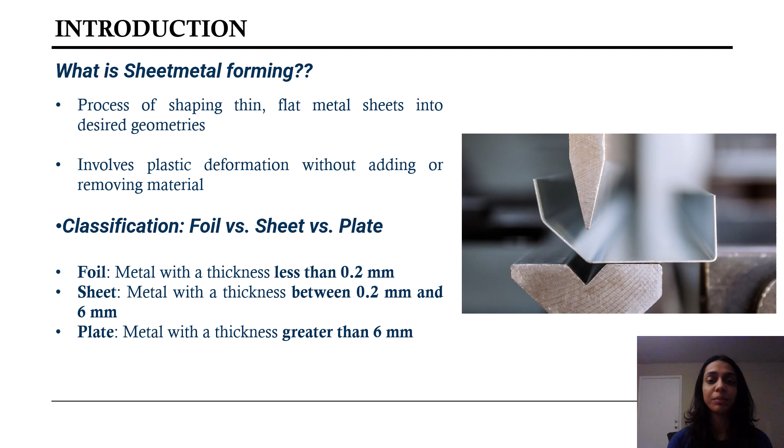Sheet metal forming is especially valuable for producing lightweight, strong components quickly and efficiently. It's essential for industries that rely on scalable, repeatable manufacturing. Sheet metal is just all around us. You name the industry and you have sheet metal there.

The automobile industry uses it in car doors, hoods, trunk lids, chassis, reinforcements, and underbody panels. In the beverage and packaging industry, sheet metal is deep drawn into aluminum cans for drinks and food storage. In aerospace, it forms the skin panels of the fuselage, turbine engine shells, and interior panels. In construction, sheet metal is used for building panels, roofing, cladding, and ductwork.

For aesthetic applications, it provides seamless and polished surfaces on consumer electronics. In the electronic industry, it's widely used for making enclosures, heat shields, and mounting brackets for devices like laptops, routers, and control panels. You'll ask why sheet metal forming is so popular.

First, it's material efficient. Since we are reshaping the material instead of cutting it away, there's very little scrap. Second, it supports extremely high production speeds, which is perfect for mass production. It also produces parts that are both lightweight and strong. Surface finish is often excellent, meaning parts can go straight to assembly without secondary operations.

The tooling, once built, allows for cost-effective production at scale, and because the process supports complex shapes, design flexibility is quite high. All these reasons combined make sheet metal forming one of the most economical and versatile processes in manufacturing.

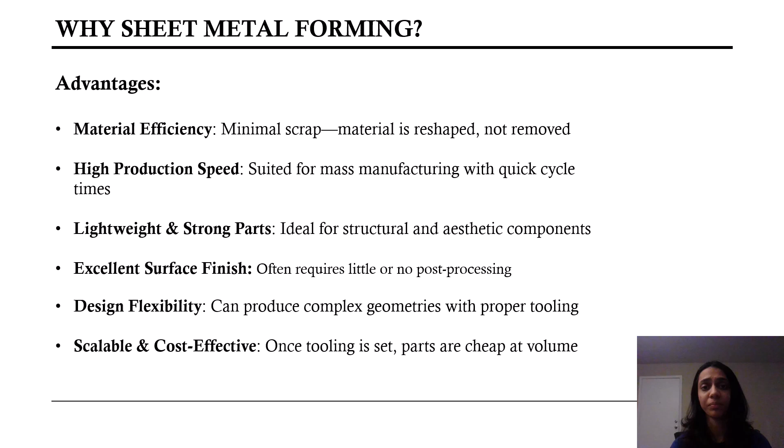So to understand how sheet metals behave, we need to first take a look at how it's made. Sheets are produced by rolling, hot or cold, through a series of rollers that compress and elongate the metal. This aligns the grains in one direction and makes the metal stronger in that direction. This introduces a phenomenon called anisotropy, which means the material's mechanical properties vary based on direction.

If we form or bend the sheets along the same direction as the rolling, the part is more likely to crack or wrinkle. But when we bend the material perpendicular to the grain direction, it helps achieve a cleaner result. Now let's take a look at the 5 material properties that really influence how sheet behaves during forming.

Ductility, as we know, is the ability of the material to undergo plastic deformation before failure. In terms of sheet metal, higher ductility allows it to be drawn or stretched into more complex parts without cracking, especially relevant in processes like drawing or stretch forming.

Malleability is the sheet's ability to be compressed without cracking. It's critical in bending and deep drawing. Yield strength is the stress at which the material starts to deform permanently. Lower yield strength generally means that the material is easy to form.

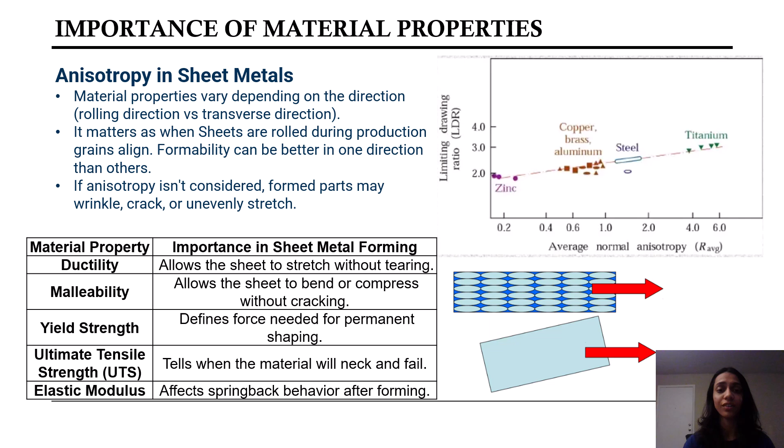So let's go over the most popular forming processes. First, we have bending. This is where we deform the sheet along a straight line to create an angle. V bending usually uses a V-shaped punch and die, while U bending creates a U profile. You'll see this in brackets and chassis parts usually.

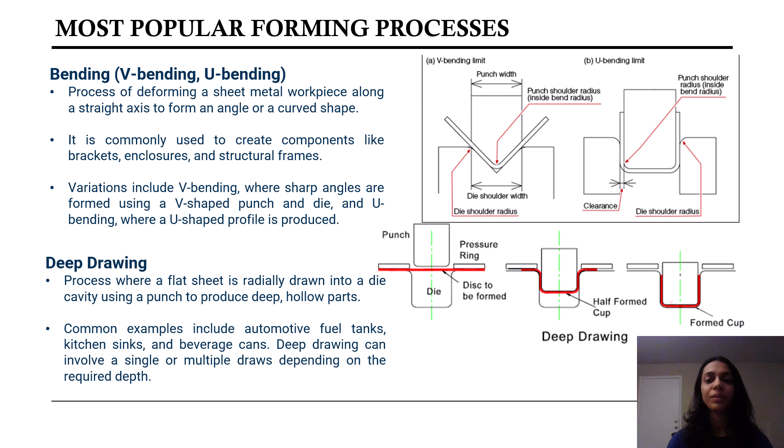The next is deep drawing. We pull a sheet into a die cavity using a punch to make a deep hollow shape. This is how we make sinks, beverage cans, and automobile fuel tanks.

Stamping is a fast, precise process where sheet is pressed or sheared between a punch and a die. This is a normal cutting operation, ideal for high-speed production. Common stamping operations include punching or piercing to create holes, blanking to cut out a part, notching, which is used to remove material from the edges, and lancing, which is used to partially cut and bend the material in one stroke.

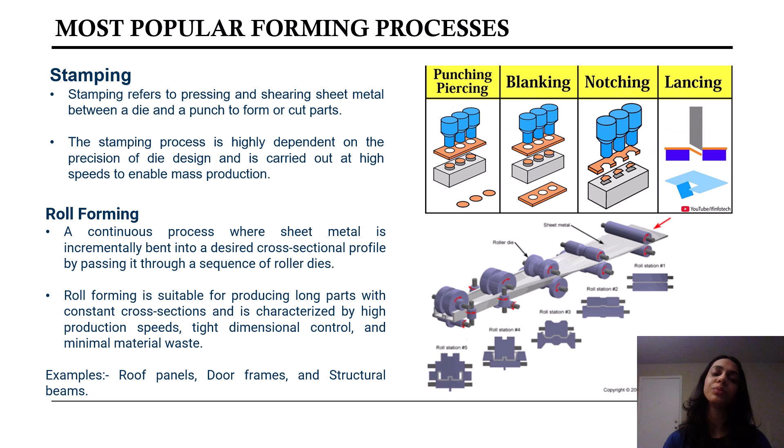Then we have roll forming, which is a continuous process where the sheet passes through a series of rollers, where each one incrementally shapes the material until the final cross section is formed. This step-by-step shaping allows complex constant profile parts to be produced efficiently, like door frames, beams, and structural rails.

Next, we have embossing and coining. Embossing creates raised or recessed designs on sheet surfaces, often for textures, logos, or grip enhancement. Coining is a high pressure forming technique that produces sharp, detailed surface features like patterns or edges.

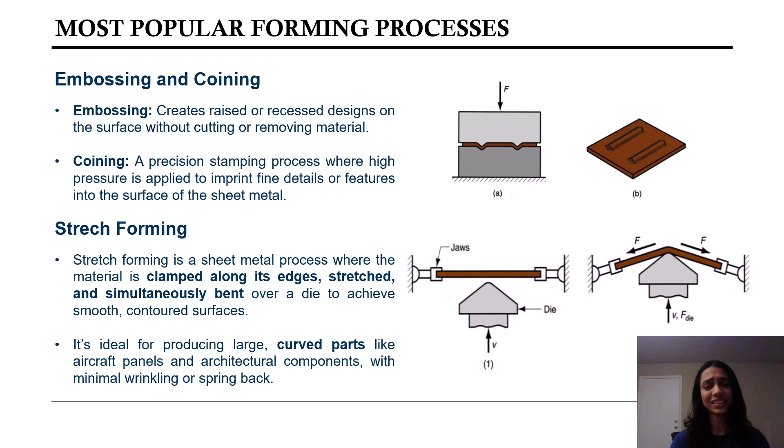Then we have stretch forming, which pulls the sheet in tension while it's wrapped over a die, allowing large, smooth contoured shapes like wing panels or architectural elements to be formed with excellent surface finish.

Now that we went through sheet metal forming processes, let's get into the guidelines. Designing for bending begins with bend radius.

It is a critical rule that the inside bend radius should be at least equal to the material thickness. If you use a smaller radius, it risks surface cracking on the outer side and compression buckling on the inner side. There's also a direct relationship between the material's hardness and the minimum bend radius required.

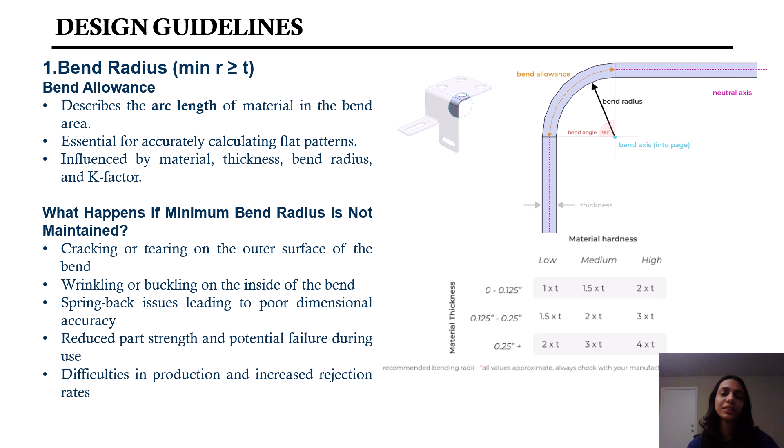We also calculate bend allowance, which tells us how much material is needed in the bend to create accurate flat patterns. This is influenced by radius, thickness, and a property known as K factor, which represents the location of the neutral axis during bending.

Finally, we must consider material orientation. As we discussed in anisotropy, rolling aligns grain in one direction, which affects how the sheet behaves when bent. Bending along the grain can cause cracking, while bending perpendicular improves formability. This is especially critical for high strength alloys. So we can see that orientation affects bend quality, reminding us to plan the layout carefully.

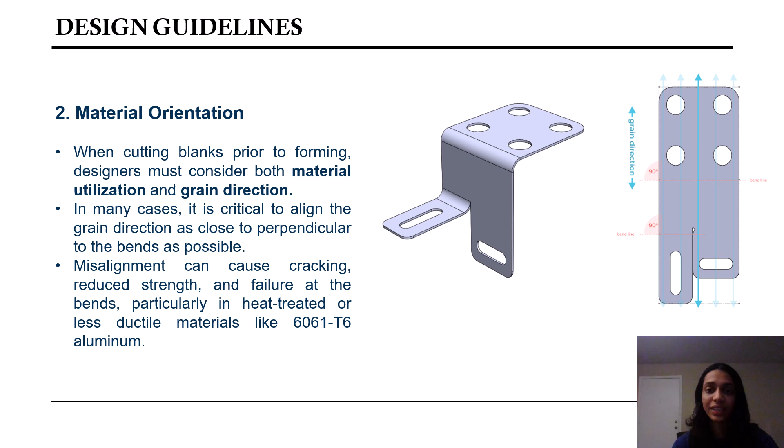So designing for holes, the diameter should be at least equal to the sheet thickness. From the edge of the sheet, the distance should be 1.5 times the thickness. And between holes, we have to leave 2 times the thickness.

We also have to consider that placing two holes too close together can cause material tearing or distortion during forming. And if the holes involve fasteners, we have to take into account the tool clearance needed around the hole so that the fastener tool can properly do its job.

From a bend, the distance should be at least 2.5 times the thickness plus the bend radius to avoid warping during bending.

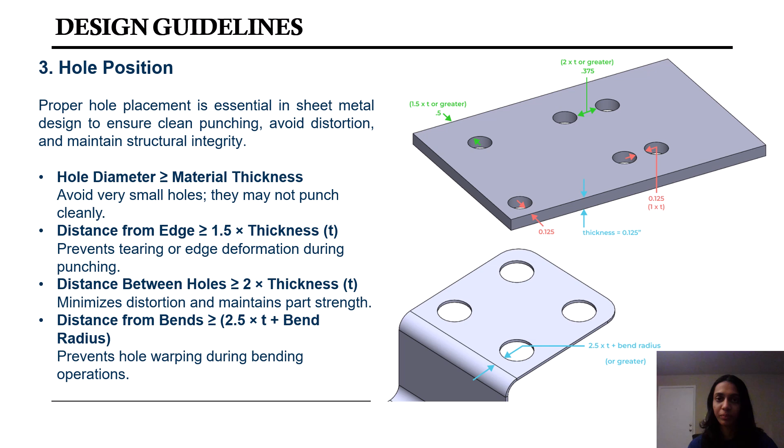Bend reliefs are important when bends end near the edges or cutouts. Without reliefs, the material can tear or stretch unpredictably. As a design guideline, the relief length should be at least equal to the bend radius plus the material thickness, and the relief width should be no less than the sheet thickness. The rounded ends further reduce the stress concentration and tearing during bending.

So you can see here how there are two different parts, one which has bend relief and one without. It's actually not feasible to even manufacture parts which don't have bend relief.

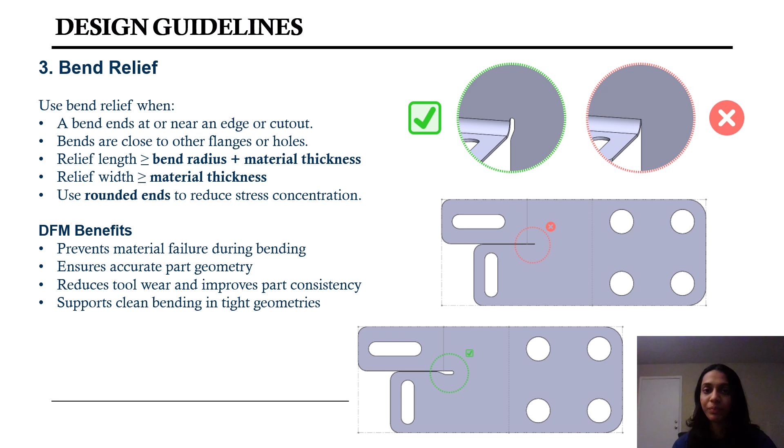For slots and notches, the width should be at least the material thickness. Keep them two thicknesses from edges and four from bends. Notches should have a corner radius of 0.5 times the thickness and should not be too deep. If they are placed too close together or too near edges, they can act as stress risers and initiate tearing during forming or under load.

Also, if fasteners or hardware are planned near these features, additional spacing must be required in order to accommodate the installation tools and maintain structural integrity.

Tabs should be at least two times the thickness wide and placed far enough to prevent buckling. So from a DFA perspective, tabs allow for simplified part alignment and reduce the necessity for secondary fixtures during assembly. They are typically created as small extensions during blanking and later bent to help with tasks like fastening, slotting, or securing parts in temporary position.

Tabs are commonly used in enclosures, brackets, and chassis structures. However, if tabs are too narrow or closely spaced, they may fail during forming or assembly. Poor design tabs can complicate automation or lead to part deformation, making them a critical feature in DFM and DFA integration.

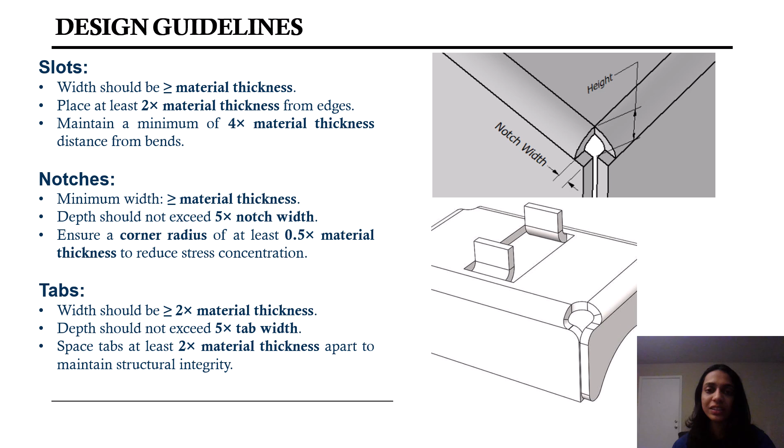So we discussed general design guidelines, and now we can move on to stiffening techniques. Gussets are triangular reinforcements added at junctions or corners to strengthen a part without adding much weight. From a DFM perspective, they increase rigidity without adding an extra component.

So if we are not including a gusset and you want to make the L shape rigid, you might have to add another material and weld it together or fasten it. However, from a DFA standpoint, they might complicate the assembly if not aligned with joining features or tool axis.

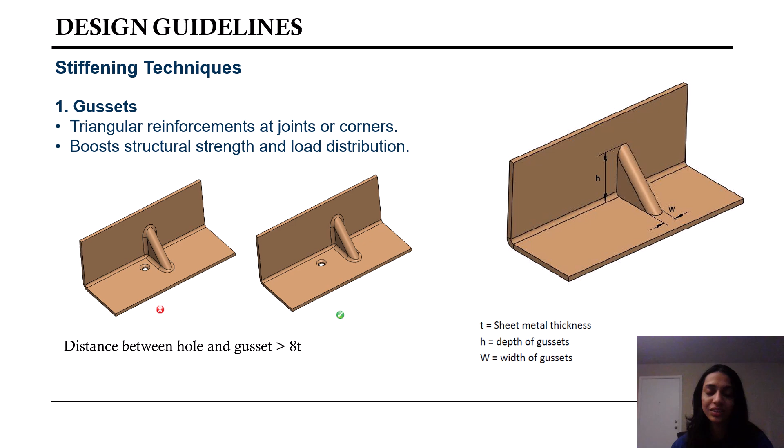Flanges and lips are bent edges that add stiffness and provide clean surfaces for fasteners, rivets, or welds. From a DFM perspective, they increase the structural integrity without extra parts. In DFA, flanges help align parts during assembly.

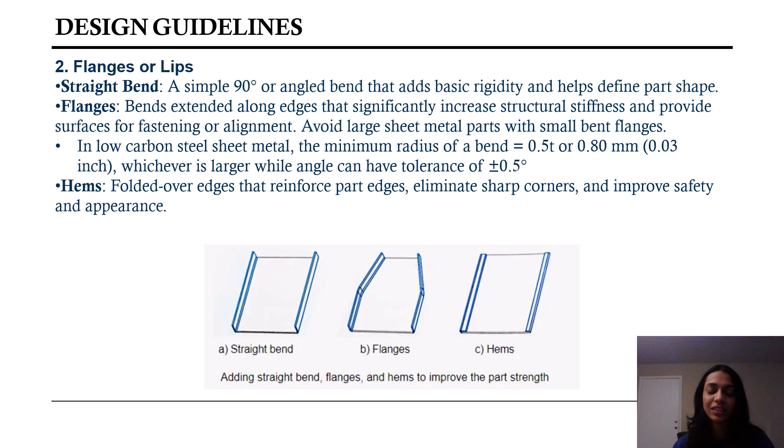Hems, which fold the edge back onto itself, are mainly used for safety and aesthetic purposes, which eliminate sharp edges. So I have seen them in scooter body panels where hems are used so that sharp edges are eliminated basically.

So curling forms a smooth looped edge which removes sharpness and improves appearance. It's commonly used on the edges of panels, doors, or consumer-facing products. Curling is typically done using a curl die that bends the edge into a near complete circle.

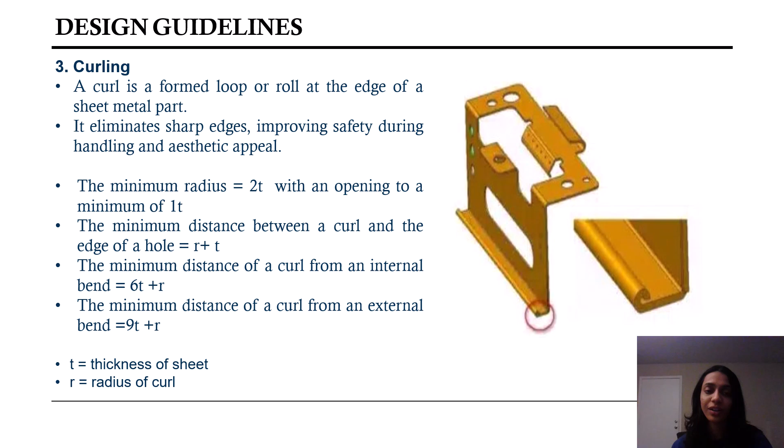Design guidelines suggest maintaining a minimum curl radius and ensuring sufficient spacing from nearby bends or holes to prevent distortion or thinning. Proper curling enhances safety, reduces handling injuries, and improves the product aesthetic. You can go through the design guidelines that are listed here.

Ribs are basically raised lines on flat panels that increase the moment of inertia by improving the resistance to bending and buckling. They are typically formed using matched male-female die sets. From a DFM perspective, ribs add stiffness without increasing the material thickness.

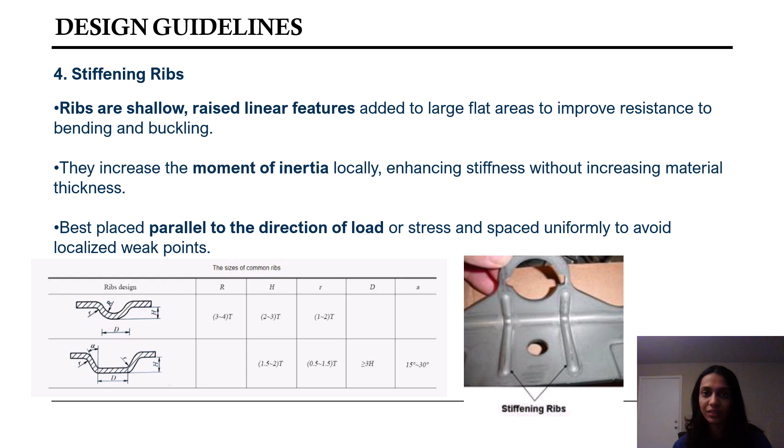In DFA, properly positioned ribs can help guide mating parts or resist deformation under assembly forces. However, poor rib placement can interfere with parts nesting or complicate tooling access during assembly.

So now you have taken all the design guidelines into consideration. You got your perfect part. Now nesting is the last piece of the puzzle. Nesting is how we lay out our parts on metal sheets before cutting or forming. Good nesting improves material efficiency, reduces scrap, and shortens the cutting path. This not only lowers cost but also supports faster production and more sustainable manufacturing.

One final detail is that when we are designing shear features like interlocks or breakaway tabs, we have to ensure that the width is at least 2 times the sheet thickness to develop enough shear strength during separation.

It is important to nest parts while considering grain direction, bending locations, and spacing. Proper nesting helps us make the most of each sheet, especially in high volume production.

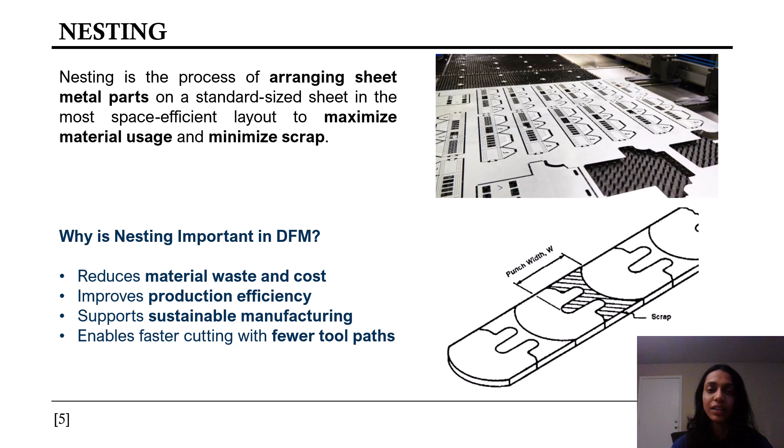Now let's look at how we estimate the cost of a die set in sheet metal format. Die cost is primarily influenced by two things: the usable area between the guide pillars and the manufacturing complexity of the part. In general, the cost of die set CDS, is where CDS is the die set purchase cost in dollars and AU is the usable area in centimeter square. We start with a fixed base cost of 120 and add a variable cost that scales with the area. The first plot here virtually confirms this linear relationship between area and cost. As the usable plate area increases, the die cost rises steadily, but area alone does not tell the full story.

Also considering complexity of the part, we use the formula of XP, where XP is a non-dimensional complexity factor, and P is the perimeter which will be sheared, while L and W are the length and width of the smallest enclosing rectangle. The complexity factor increases with irregular part shapes or higher perimeter to area ratios. The second graph here shows how basic manufacturing effort, measured in points, increases with complexity XP. So more complex shapes, even with similar areas, will be costlier and harder to tool.

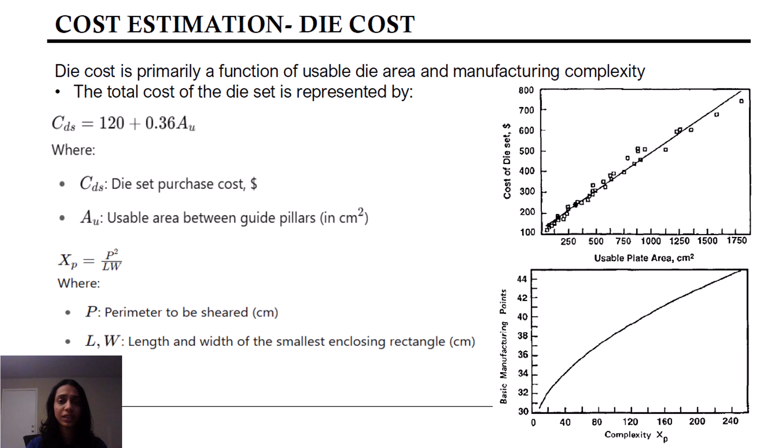The key assumptions here are that the material of the die is standard tool steel, the process uses conventional guide pillars and press setup, and the cost model assumes mild volume production, not amortized over high volume runs.

The die plate thickness correction factor is calculated with the formula FD, where there's a minimum value of 0.75 taken, whichever is larger. So we now need to compute HD, the required die plate thickness based on wear and stiffness requirements, which is given by the formula you can see below.

U is the ultimate tensile strength of the material. UMS is the strength of annealed mild steel, used as a baseline. V is the production volume, in thousands. H is the sheet thickness in mm. As the production volume or material strength increases, or when the sheet is thicker, the die needs to be stiffer and more wear resistant. Hence HD increases and so does the cost.

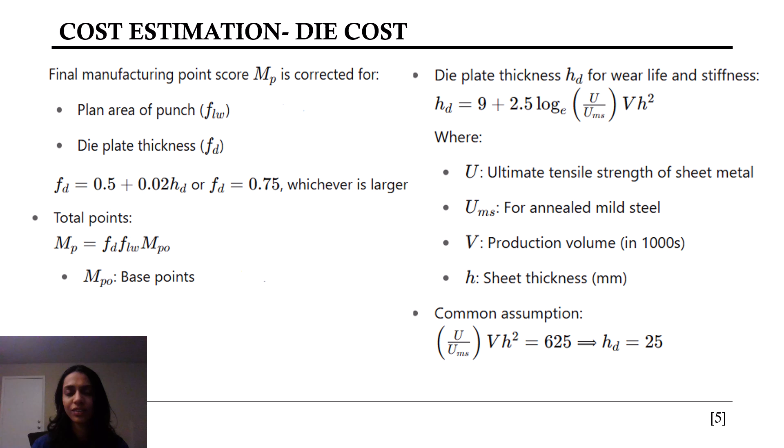So the base manufacturing score is noted by MPO, given by the equation below, where L and W are the enclosing rectangle's length and width in centimeter, capturing the footprint of the flat pattern, and D is the depth of the formed part. If the depth is less than 5 centimeters, we still use 5 as the minimum, which ensures that shallow parts don't get underestimated in effort. The formula basically scales the base points with part size and depth. Larger, deeper parts need more material flow, tooling control and press tonnage, hence the score increases.

Next, we add the effort due to bending operations, since each bend adds tool complexity and setup time. That is given by the equation of MP, which you can see. LB is the total length of bend lines across the part in centimeter, while NB is the number of unique bends or stations. This equation gives us a clear way to quantify how much extra effort each fold or bend adds. Longer bends take more press energy, while a greater number of bends means more tool changes or stages in the operation.

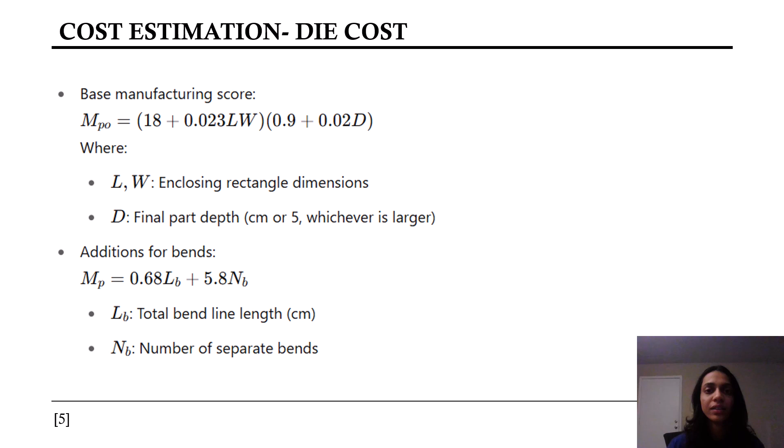So let's say we are given the base manufacturing point score MP0, which is 30.5, calculated using the part's envelope dimensions and depth. The plan area is length into width, which we'll consider 300 centimeters square. This gives us an area correction factor FLW of 2.5, which comes from the graph shown on the right and varies based on complexity and punch area.

Next, we calculate the die thickness, where HD is 26.6 mm, based on production volume, material strength, and sheet thickness. Plugging that into the correction formula, we get FD equal to 1.03. Now we calculate the adjusted manufacturing effort, where MP is 78.5.

The die set cost is calculated using the CDS formula, which comes out to 390, where 750 centimeters square is the usable guide pillar area. Now we calculate the total die cost by multiplying manufacturing effort with the cost per point, where here we have $40 per point. So the total die cost comes out to $3,530.

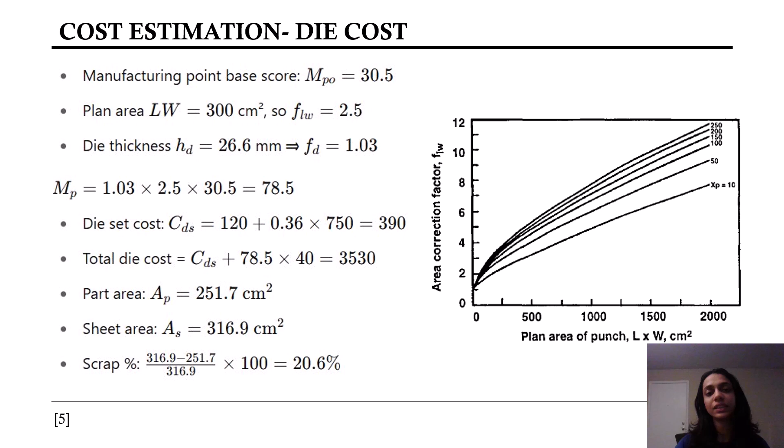We also analyze the material efficiency, where the part area is 251.7 centimeters square and sheet area required is 316.9 centimeters square, which gives us a scrap rate of 20.6%. This example shows how each factor - geometry, material strength, production volume, and part complexity - feeds into the comprehensive and scalable cost estimation framework for tooling. This kind of insight is invaluable in design for manufacturing decisions.

Let's consider the time estimation which adds up to the die cost. The force required for shearing is given by the equation F equals 0.5 into U into H into LS, where U is the ultimate tensile strength of the material, H is the gauge or thickness of sheets in mm, and LS is the total shear length, also in mm. This gives us a shear force in Newtons, which helps us determine the press force required.

With this, we can estimate both production time and press operating cost, which helps us decide whether a larger speed or a larger press force is economically justified based on our desired volume or complexity of the part. These values feed into both direct labor cost and capital equipment planning, ensuring our forming line is optimized for speed, force, and cost efficiency.

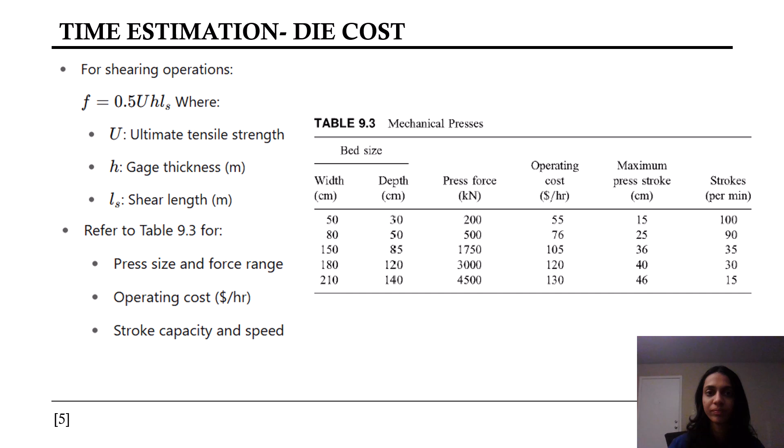So we have looked at shearing. Now let's explore bending, shallow forming, and embossing processes, which are also crucial in determining die size, press force, and time. For wiper die bending, an approximate bending force is given by the two formulas shown below, where U is the ultimate strength of the material, H is the thickness, LB is the total length of the bend, and R1, R2 are the radii of punch and die profiles.

For shallow forming, like drawing a shallow dome or dish, the required force is given by the formula shown below. Theta is the wall angle of the form feature. Force increases as the wall angle gets steeper or material gets thicker.

So finally for embossing, which involves pressing fine features or logos into the surface, the force is determined by F equals phi U into A, where A is the area to be embossed, phi is the constraint factor which is greater than 1, accounting for extra resistance due to confined flow. These formulas help us determine the press capacity needed and time per operation.

More force generally means slower cycles or more robust tooling, which in turn feeds directly into both cycle time and die cost. By calculating accurate force for each operation, we make informed decisions about machine size, tool material, and throughput, ultimately optimizing both performance and cost.

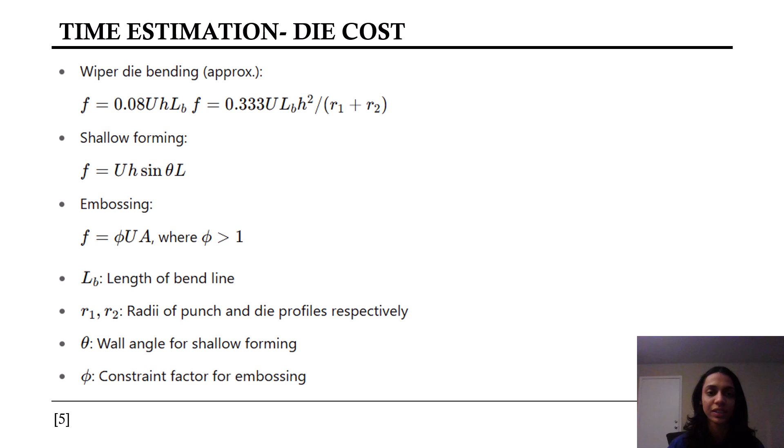To complete the time and cost estimation, we also need to factor in loading and unloading time, and ultimately calculate the cost per part. The time estimated to load and unload the part is given by the first formula, in seconds, where L and W are again the overall length and width in centimeters. This equation accounts for handling time and scales with part size.

For blanking and piercing operations where auto ejection is used, only 2/3 of this time is applied since parts are ejected automatically. For bending, however, the full cycle time applies because parts are often removed manually to prevent damage or warping. Once we know the time spent per press station or operation, we can compute the cost per part, which is CP, using the formula given below.

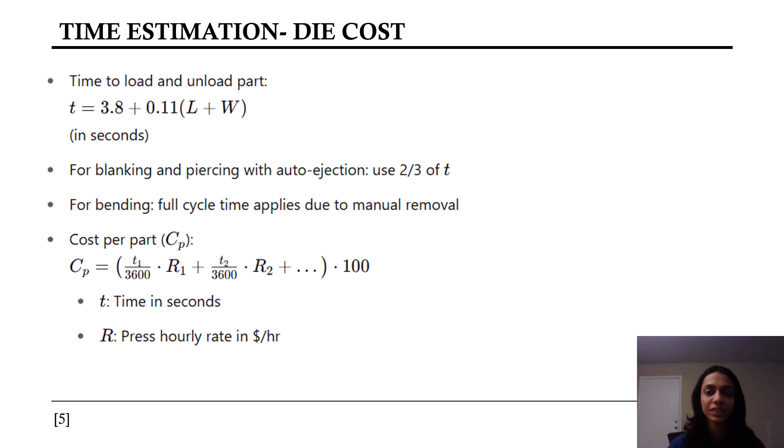T is the time of operation in seconds, and R is the press hourly rate in dollars. This gives us a very detailed and operation-specific way to estimate forming cost per unit, letting us directly compare process routes or tooling choices and justify automation investments or press selection decisions.

Let's wrap up the time estimation by discussing progressive dies, which combine multiple operations like shearing, piercing, and bending into a single automated process. The total force required here is the sum of the forces of all the operations in the die.

If we are designing a progressive die, say for 4 stations, we also need to allocate the physical space. That is calculated by 4 into 100mm plus 3 into 2 times the thickness, where 3 is the gap between the stations. The formula gives us a total strip length of about 418.5 in this case. This is critical when designing strip layout and estimating blank feed per stroke.

For cycle time, progressive dies operate at a high speed, given by 60 upon strokes per minute. We also have the cost per part, which is T upon 3600 into R into 100, where R is the press hourly rate. This equation captures how long the press runs per part and converts it into a dollar figure.

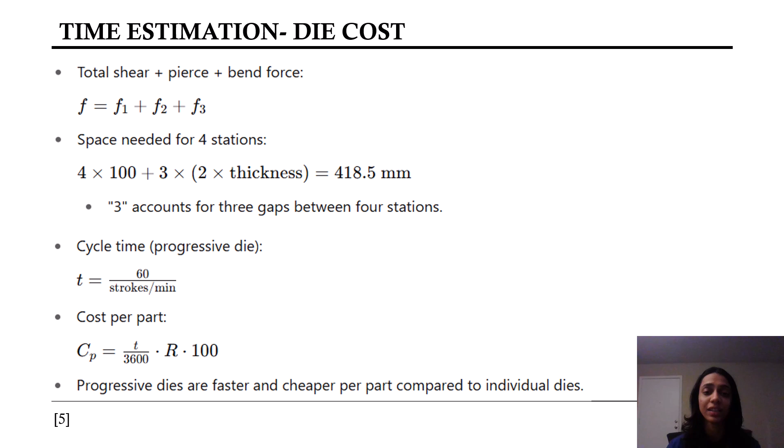It is important to note that progressive dies are significantly faster and more cost effective per part compared to using multiple individual dies. They reduce handling time, increase throughput, and are ideal for high volume production. That's why they are widely adopted in consumer electronics, automotive brackets, and appliance components, anywhere speed and repeatability matters.

To wrap up everything: sheet metal forming is a powerful process that reshapes flat metals using plastic deformation, where no material is added or removed, just skillfully redirected. It's the backbone process in industries like automotive, aerospace, electronics, and appliances due to its strength, precision, and efficiency. By applying design for manufacturing principles, we ensure better part manufacturability, enhanced structural performance at lower cost. Let's quickly revisit the key guidelines.

Always maintain an appropriate bend radius to avoid cracking. Respect distances for holes, bends, and edges to prevent tearing and deformation. Incorporate stiffening features like flanges, ribs, and gussets for added strength. Don't forget to account for material orientation and anisotropy, as these factors affect how the part will behave during forming. Efficient nesting and accurate cost estimations are essential for scaling up production while staying cost competitive. Ultimately, good DFM doesn't just make parts, it makes better parts, smoother production, and stronger engineering decisions.